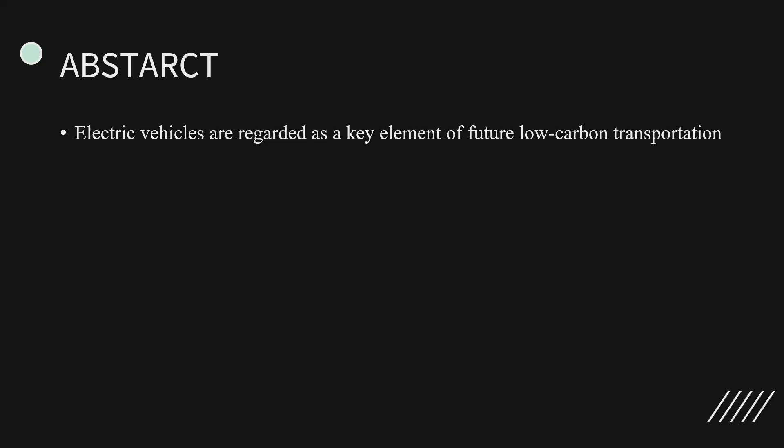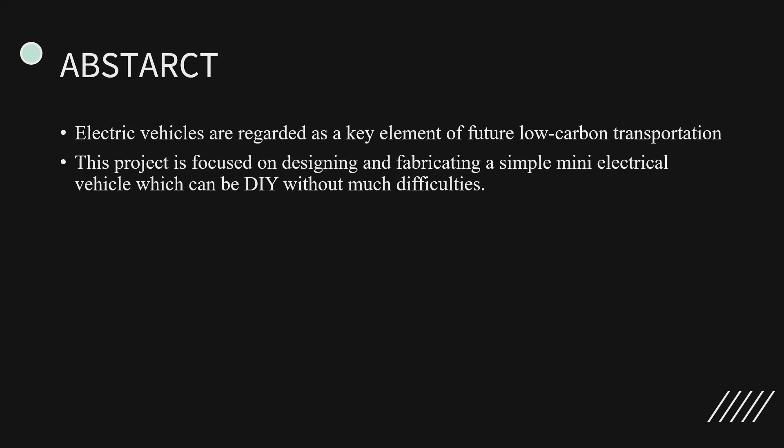The title of the project is Design and Fabricate Low-Cost Mini Electrical Vehicle. Abstract. Electrical vehicles are regarded as a key element of future low carbon transportation. This project is focused on designing and fabricating a simple mini electrical vehicle which can be DIY without much difficulties.

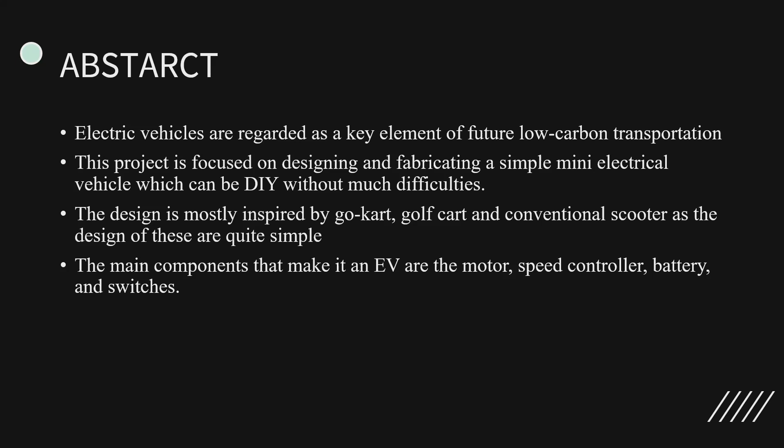The design is mostly inspired by go-kart, golf cart and conventional scooter, as the design of these are quite simple. The main components that make it an EV are the motor, the speed controller, the battery, and some switches. Chapter 1: Introduction. The background.

Hans Christian Ørsted and André-Marie Ampère discovered electromagnetism, the unity of electromagnetic phenomena, from 1819 to 1820. Michael Faraday invented the electric motor in 1821, and Georg Ohm conducted a mathematical analysis of the circuit in 1827.

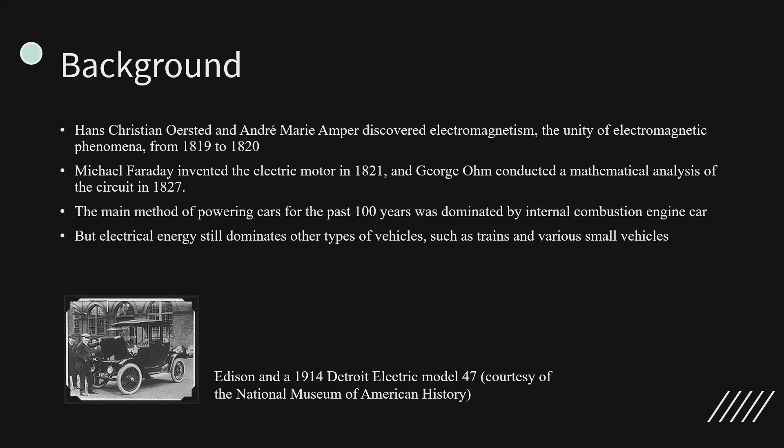The main method of powering cars for the past 100 years was dominated by internal combustion engine cars. But electrical energy still dominates other types of vehicles, such as trains and various small vehicles. From the picture, we can see Edison and a 1914 Detroit Electric Model 47, courtesy of the National Museum of American History.

EV nowadays. In the 21st century, EVs have undergone a renaissance due to technological development and increasing attention to renewable energy from a variety of sources, including fossil fuels, nuclear energy, and renewable energy sources such as tidal, solar, hydro, and wind energy, and any other combination of them. The electricity can then be stored on the vehicle via a battery, flywheel, or a supercapacitor.

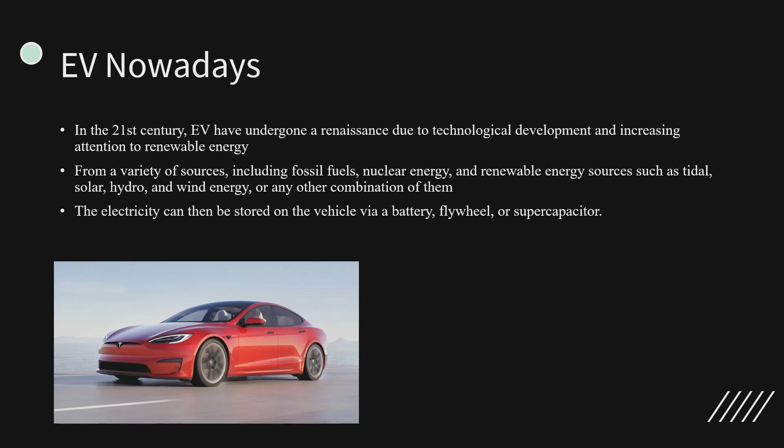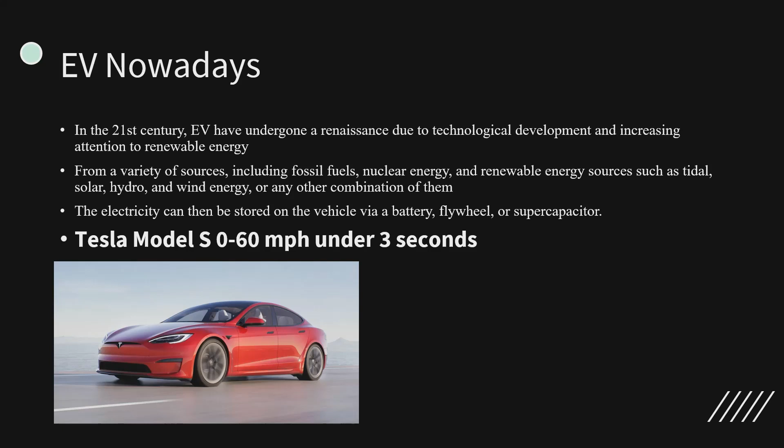By the way, this is the Tesla Model S. It can go from 0 to 60 miles per hour under 3 seconds. A modern EV is very expensive. The infrastructure and R&D cause the price of the EV to be sky high.

And also, making a DIY simple mini EV could be difficult for some people, as they may not have the knowledge, facilities, and materials needed to make one. And also, CAD programs need to be purchased, and a more powerful computer is needed to run them smoothly. Otherwise, you have to wait maybe a day or two to finish computing.

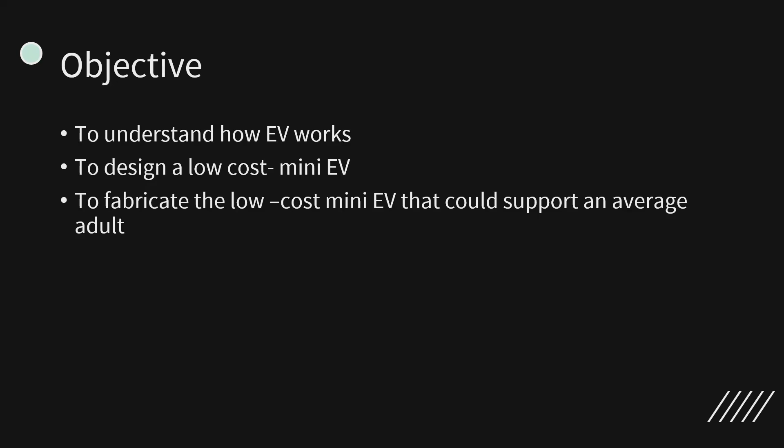The objective of this project is to understand how EV works, to design a low-cost mini EV, and to fabricate the low-cost mini EV that could support an average adult. The work scope and limitation. The design should use minimal and inexpensive parts for the low-cost design. It should also have the strength to support the mass of an average adult.

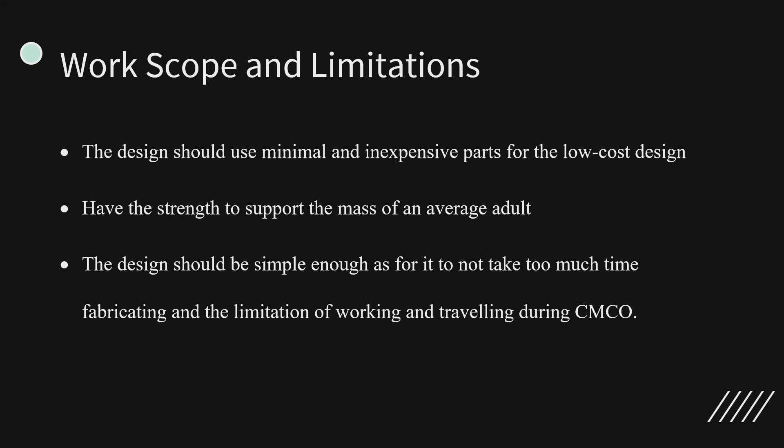The design should be simple enough so that it does not take too much time fabricating, and the limitation of working and traveling under CMCO. With the planning and preparation made for this project, the expected result is a finished and working low-cost mini EV. Chapter 2. Literature Review.

Introduction. A brief review of literature is provided on the following topics: the introduction to the EV, design principles of EV, components of EVs, and some of the charging schemes. EV or electrical vehicle is a combination of automotive, electrical, electronics, and chemical engineering by Chan 1993. The overall efficiency of EVs can be improved by combining several technologies by Chan 2002.

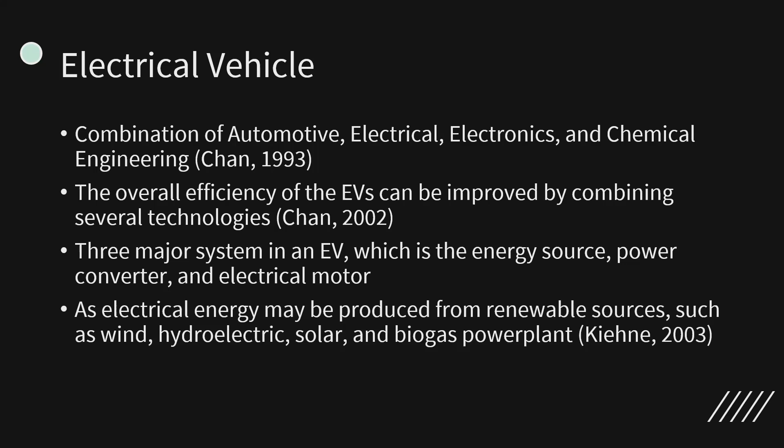Three major systems in an EV are the energy source, power converter, and electrical motor. Electrical energy may be produced from renewable energy sources such as wind, hydroelectric, solar, and biogas power plants by Kiehne 2003. Design Principle of an EV by Sharma, Panwar and Tripathi 2020.

Determining all the technical specifications and estimation of load requirements for EV. Also, identifying the environment and market trend for EV. Depending on the market, what type of vehicle is needed and which one is more popular. Defining the energy supply for different cases such as generation or storage, single or hybrid power supply.

Defining the system requirements according to its configuration for various applications such as hybrid EV, which consists of internal combustion and an electrical motor, a battery EV, which mainly uses a battery to power up the vehicle, and a fuel cell EV, which usually uses chemical energy such as hydrogen to generate electricity and move the car.

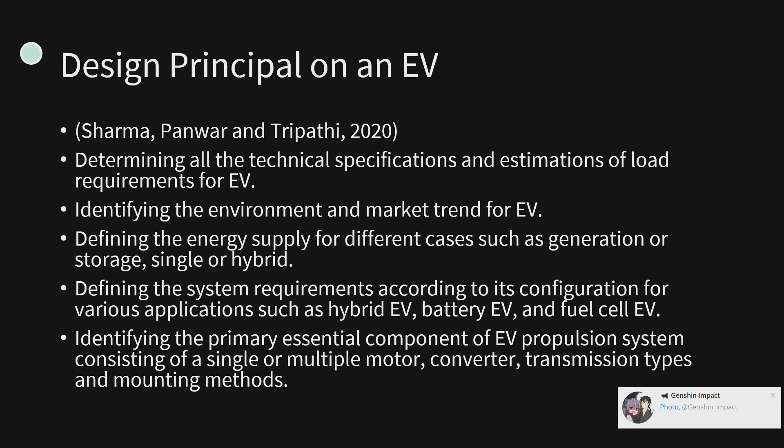The usual position of the engine in front is now an empty space. You can store much needed items. This proves that electric vehicles can save space inside the cabin. EV's key components by Diamond 2009.

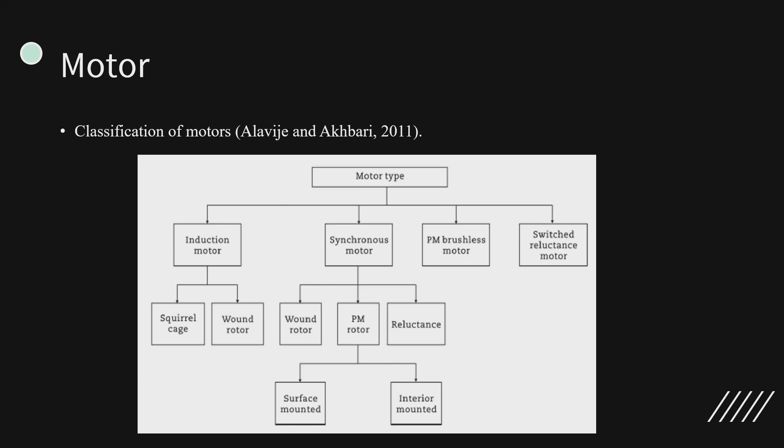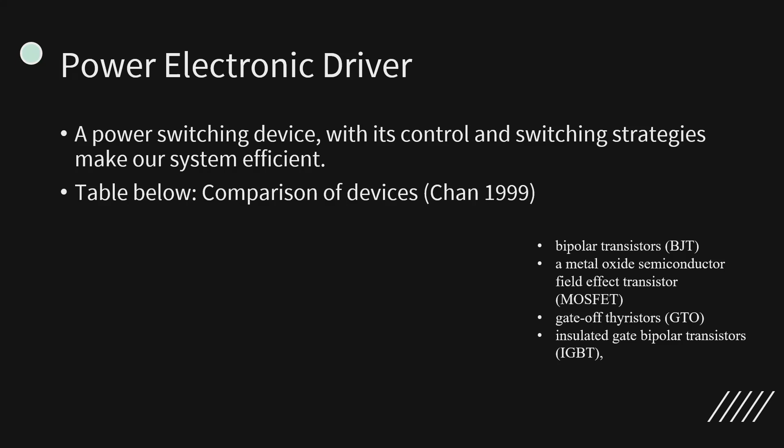And for the PM rotor, they have surface mounted, where the magnet is mounted on the surface, and interior mounted, on the interior. There are also permanent magnet brushless motor and switched reluctance motor. Power electronic driver. It is a power switching device whose control and switching strategies make our system efficient. The table below shows the comparison of devices by Chan 1999.

IGBT is an insulated gate bipolar transistor, and MOSFET is a metal oxide semiconductor field effect transistor. As you can see from the figure, the voltage drop is medium for the IGBT, low for the transistor, and high for the MOSFET. The control power is low on IGBT, high on transistor, and low on MOSFET. The control mode is voltage, current, and voltage.

The transistor uses current to control the power. As for switch speed, for the IGBT it is fast, the transistor is medium, whereas the MOSFET is very fast. Voltage rating: for the IGBT it is medium, the transistor is also medium, and low on MOSFET. However, for cost, IGBT is low, transistor is low, and MOSFET is high.

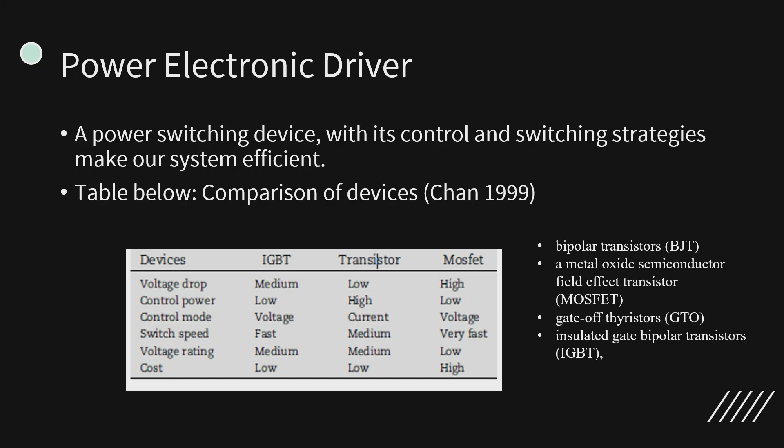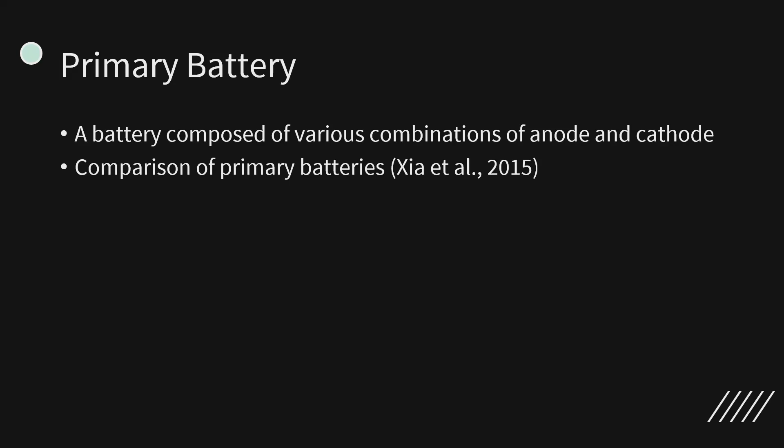Primary battery. It is a battery composed of various combinations of anode and cathode. Comparison of primary batteries by Xia et al., 2015. Some of the primary batteries are zinc carbon, alkaline manganese, zinc air, silver oxide, lithium sulfur dioxide, lithium thionyl chloride, lithium manganese dioxide, and lithium carbon monofluoride.

A rechargeable battery in energy sources and energy source systems, that is the secondary battery. The creation of the lead acid battery in 1859 by Planté, Broussely and Pistoia, 2007, Wendt and Tracer, 2013. Later, the nickel-iron alkaline battery was introduced as a power source for the electric automobile by Edison in 1908. Shen, 2016, Thomas, 2010, Zosky, 2006.

These are some other critical commercial batteries that are also discussed in detail and summarized in the table below by Xia et al., 2015. The secondary batteries are lead acid, nickel cadmium, nickel metal hydride, lithium ion, lithium sulfur, and lithium air.

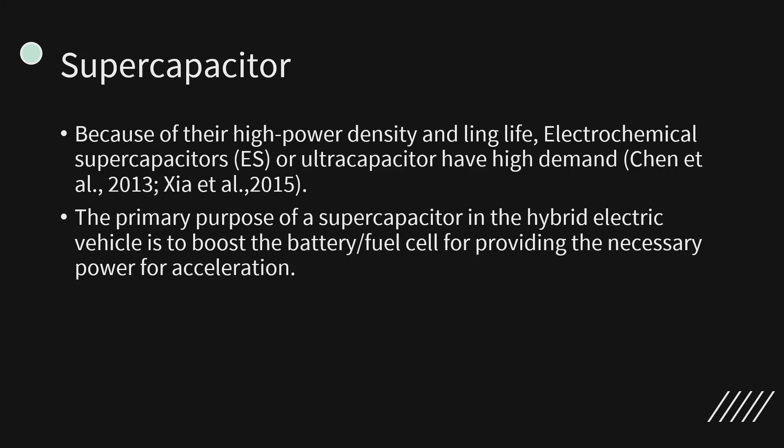Supercapacitors. Because of the high power density and long life, electrochemical supercapacitors, ES for short, or ultracapacitors have high demand. Chen, 2013, Xia, 2015. The primary purpose of a supercapacitor in the hybrid electric vehicle is to boost the battery or the fuel cell for providing the necessary power for acceleration.

Charging scheme. Charging is more than just charging the battery. It also requires an advanced control system to regulate the current and voltage. The loading and unloading process helps to determine the safety, durability, and performance of a battery motor.

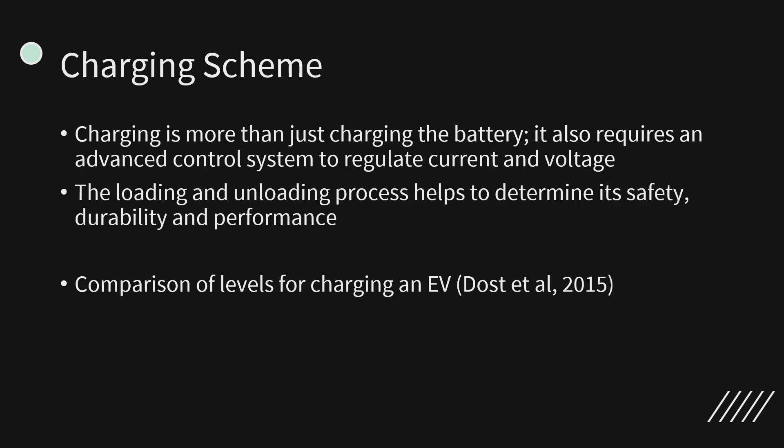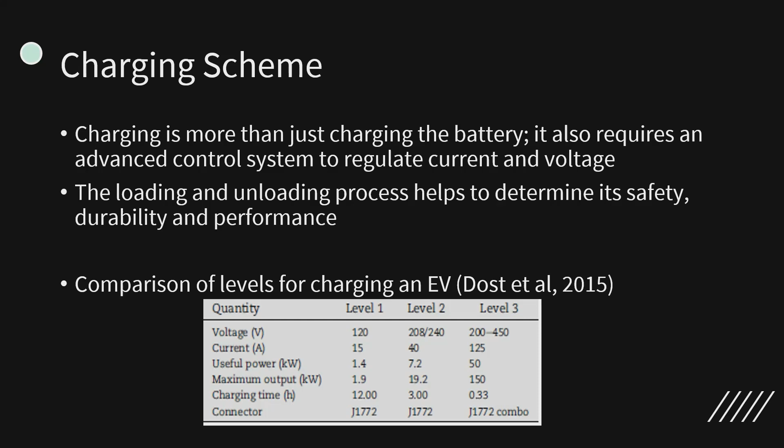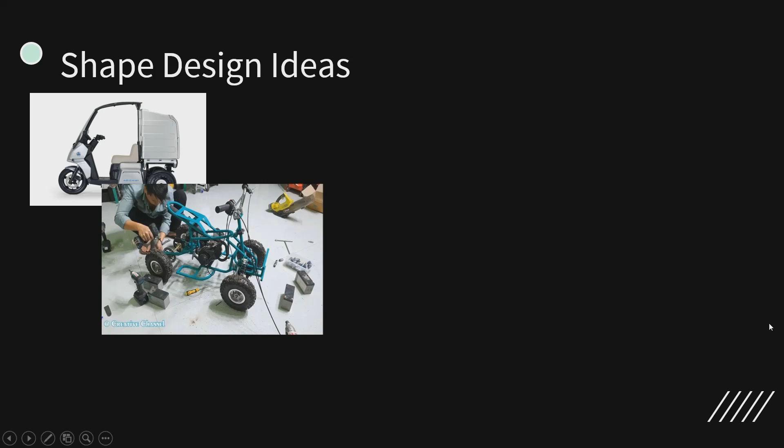Design ideas. These are several ideas from around the world. You see over there, an electric moped type. This is a mini ATV. This is a go-kart made from PVC pipes. We also got the Citroen Ami, which is legal on the road.

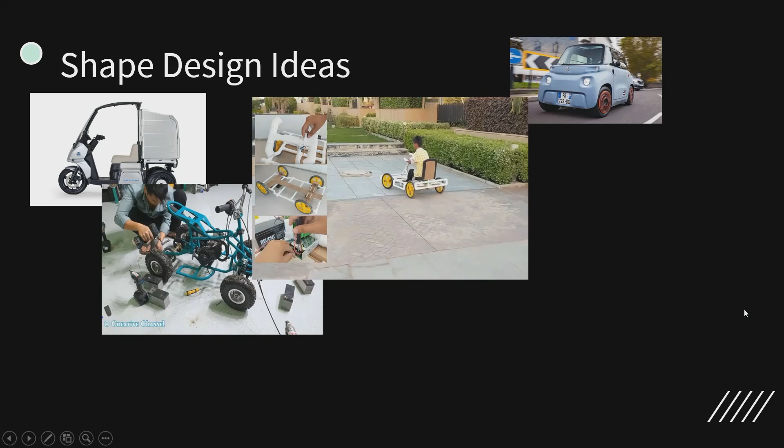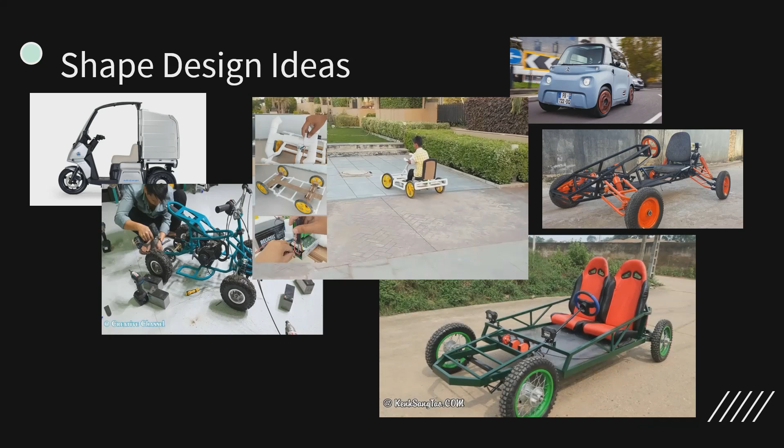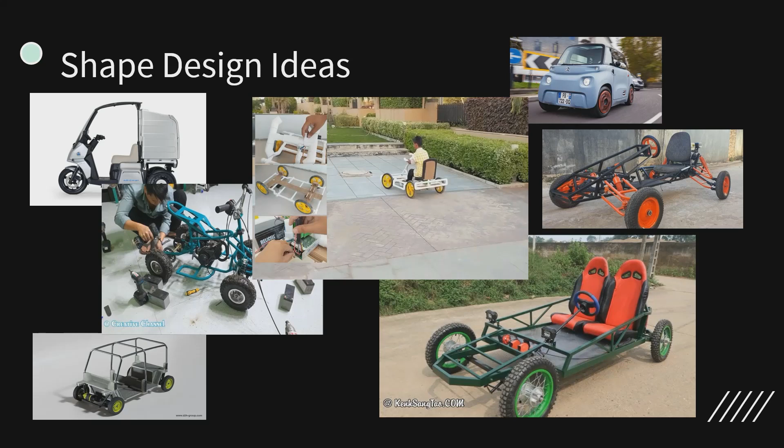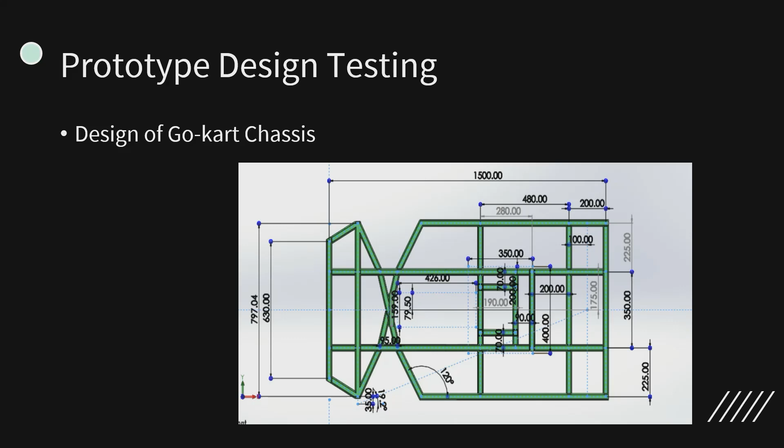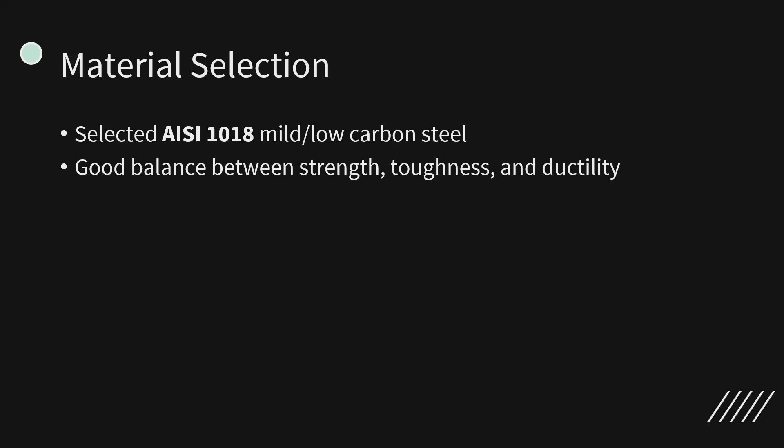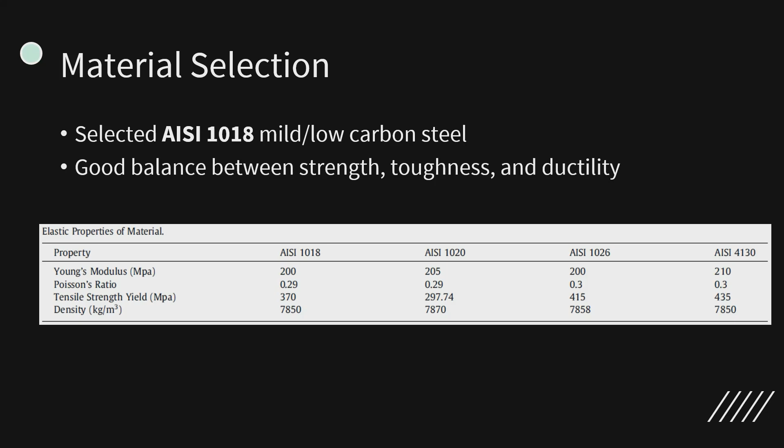Material selection. We selected AISI 1018, which is a mild or low carbon steel. The reason is because it has a good balance between strength, toughness, and ductility. Also, the price is not too high compared to the others. As you can see, the other three are AISI 1020, AISI 1026, and AISI 4130. Even though AISI 4130 has a very high tensile yield strength, the price is very high, so it makes it difficult for this project.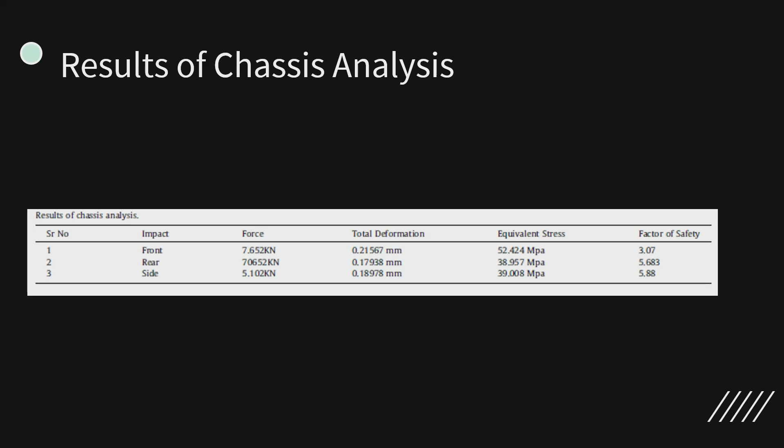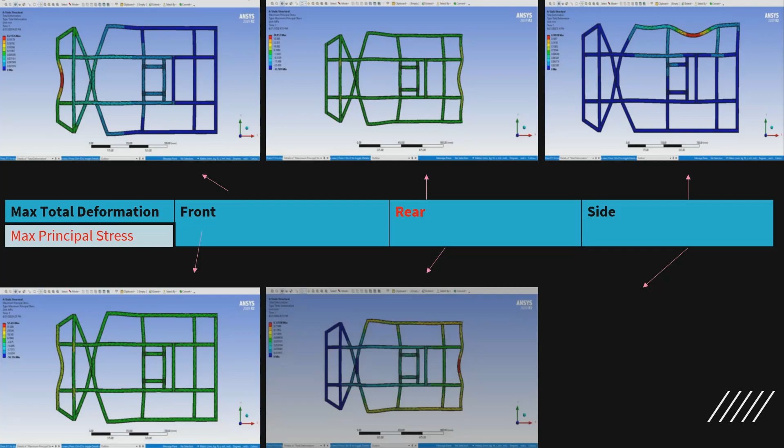This is the result. On the top is the max total deformation. On the left is the front collision, front impact. The center is the rear impact, and the right side is the side impact, as you can see from the deformation. And at the bottom is the max principal stress: front impact, rear impact, and side impact.